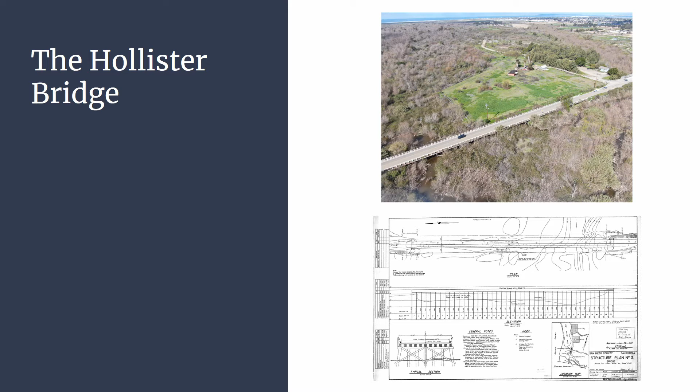The existing Hollister Street Bridge, shown here, is approximately 820 feet and made primarily of wood. The bridge has long outlived its purpose in serving the county of San Diego. We have answered the county's demands, and the new bridge will have an equestrian lane, wider shoulders, and a pedestrian sidewalk.

After further research and analyzing the needs from local law enforcement and first responders, we decided to demolish the bridge in 2 phases. The reason for this is because Hollister Street is the only efficient route to get to the community south of the Tijuana River, and closing that access can add up to 10 minutes of response time.

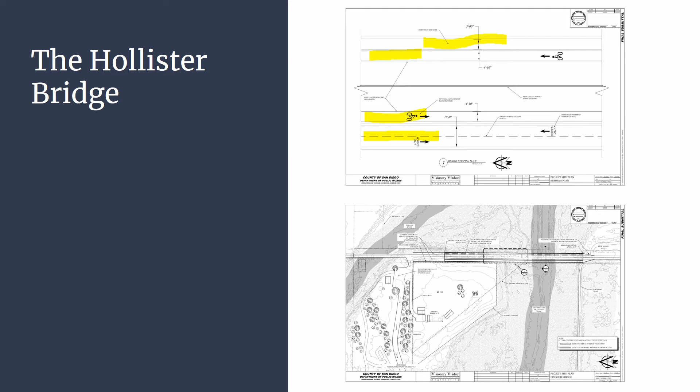It is estimated that approximately 35,000 cubic yards of unclassified fill material was placed on the Brown property by a previous owner and now needs to be removed. The removal of the illegal fill is important for the local area as its placement on the property is believed to have an adverse effect on flooding in the surrounding area. Studies on how this fill removal will affect the bridge design and the surrounding hydrology were conducted.

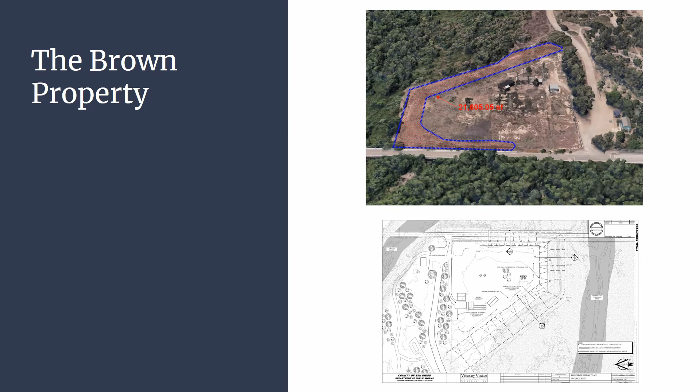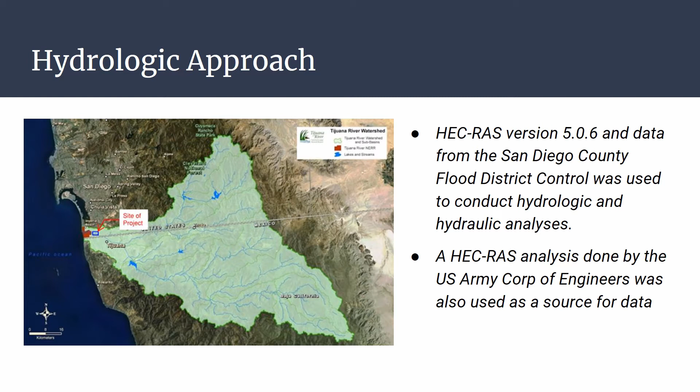Hello, my name is Daniel Olague, and I was in charge of the hydraulic analysis. For the hydraulic approach, HEC-RAS version 5.0.6 and data from the San Diego County Flood Control District was used along with a HEC-RAS analysis on the Tijuana River that was already conducted by the United States Army Corps of Engineers. From that report, a table was provided by the International Boundary and Water Commission giving the annual peak flows from 1962 to 2015.

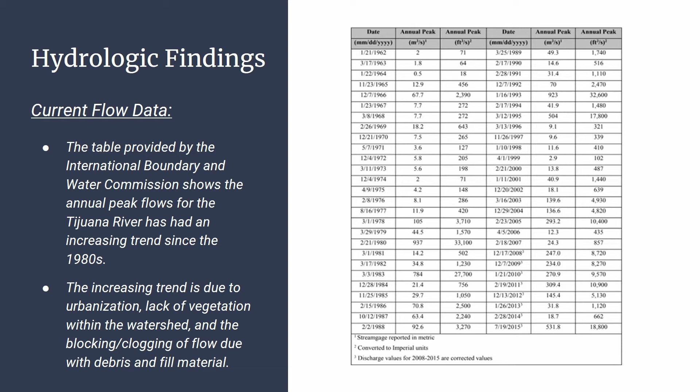As you can see, the trend after 1980 shows a gradual increase in peak flow. This trend is most likely due to urbanization, lack of vegetation, and clogging of flow due to debris and fill material within the Tijuana River watershed.

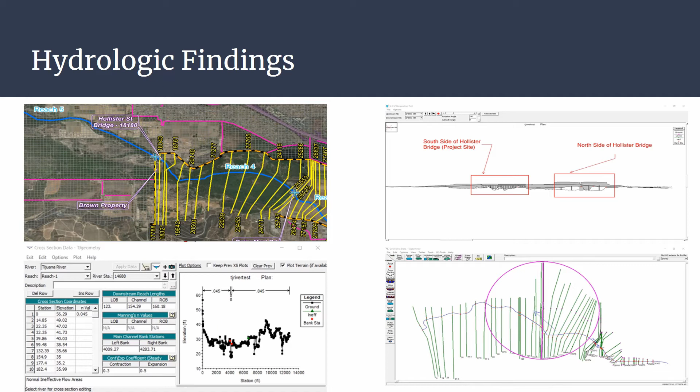Here on the top left is a picture also taken from the United States Army Corps of Engineers HEC-RAS analysis and how they created different reaches and stations for the Tijuana River. The other pictures are screen captures of geometric data of the river station containing the Hollister Bridge and Brown property area. This was found using data provided by the Flood Control District during the HEC-RAS analysis attempted.

Hi, I am Ricardo Ibarra, and I am the Environmental/Stormwater Engineer for Visionary Viaduct. I was in charge of the stormwater analysis for this project. The goal was to create a drainage system that will mitigate any adverse flooding effects from the newly built Hollister Bridge and on the removal of the fill of the Brown property. The goal is to generate no more runoff after development than before development.

San Diego County Hydrology Manual as well as SanGIS website was used to find the soil types in the site location as well as the rain intensity. The flow rate in the area was found using the rational method. After plugging in values into the equation, we found that the flow rate in the areas were 1.13 for the Brown property and 0.17 cubic feet per second in the Hollister Bridge area. Inlet areas of 0.13 feet squared and 0.75 feet squared on concrete sewer pipes of 5-inch diameter should be installed to minimize the rain runoff from the site location.

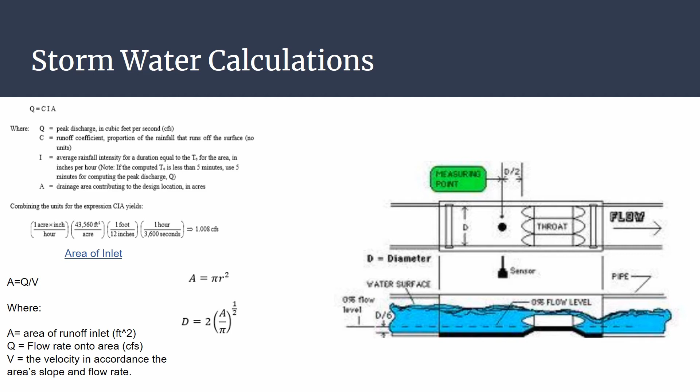The purpose of the SWPPP is to maintain water quality by keeping documentation and following BMPs for this project. Visionary Viaduct will oversee that everything in this SWPPP is accurate and complies with San Diego County regulations. The project is being performed with County of San Diego, California jurisdiction. The SWPPP has been prepared to comply with State Water Resources Control Board, National Pollutant Discharge Elimination System, waste discharge requirements, and together these measures will minimize stormwater runoff and keep the construction site from receiving costly penalties. Most important, the job will be completed with minimal environmental impact.

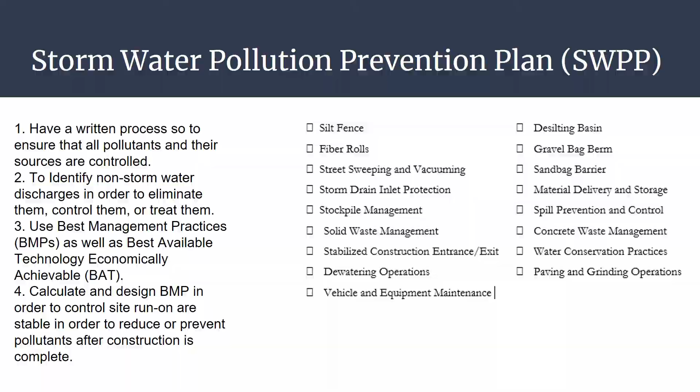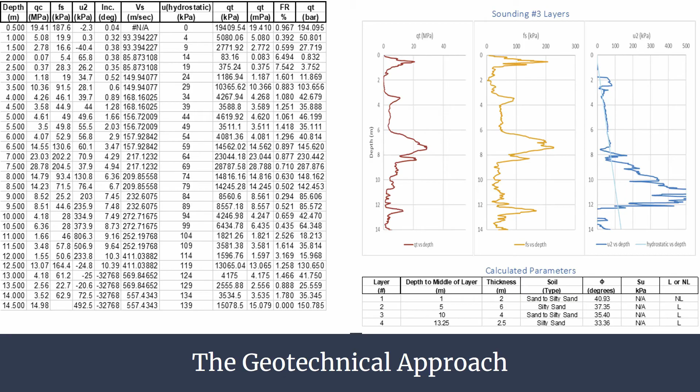So in summary, the geotechnical analysis showed that the subsurface layers were all susceptible to liquefaction and all sand layers. Soil is saturated with the water table being 2 feet below the surface. The illegal fill is approximately 7 to 10 feet in depth, and the illegal fill is mostly unusable according to local rangers.

So my recommendations, in accordance to my findings, were the substructure design should consider that all layers are liquefiable, possibly drilling the substructure all the way to bedrock and to account for that in their design. And for the grading of the Brown property, to not exceed an angle of 40 degrees in accordance to the friction angle of the soil.

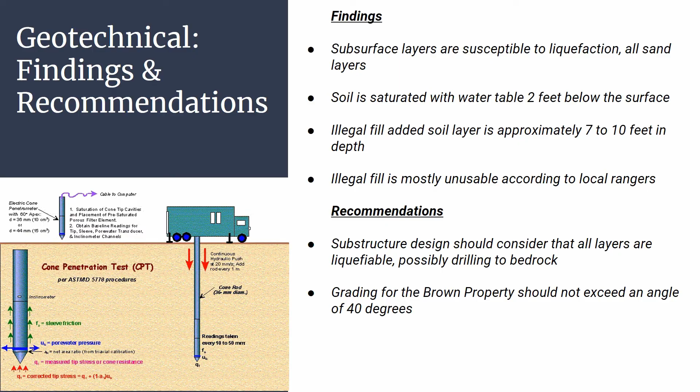Hello, this is Bryan, and now we'll be going over the substructural part of the structure report. First, we'll start off with the structural approach for the structural report. Chapter 13, Concrete Columns from Caltrans Bridge Design Practice, 4th edition, and ACI 318 were used as guidance for column design. And for pile design, Chapter 16, Deep Foundations, Dr. Valdez's CIV 465 reader and Edwards' analysis of the cone penetration test data were all taken into account.

Now we'll go over the structural findings for substructure. For column design, due to having a construction plan in which the bridge will be cut based on the center line striping rather than the center of the bridge, the columns needed to be designed to hold 60% of the total load. Due to this, the columns were designed to be 37 inches by 37 inches with a length of 20 feet. The column was then reinforced with 16 number 8 rebars and a number 4 tieback to prevent shear.

For pile designs, because of the amount of load imposed by the bridge, it was decided to design deep foundations. The piles will be square piles and made out of concrete with a side length of 1.6 feet and will be 14.5 feet in depth. A pile cap will be used to connect the columns to the pile. The square pile cap is to be made out of concrete, being 96.7 inches by 96.7 inches with a thickness of 32 inches.

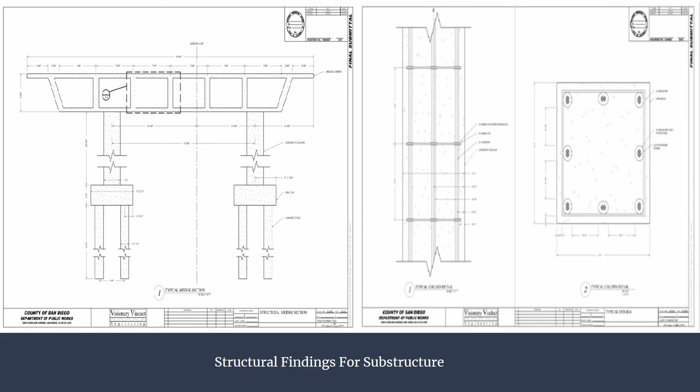My name is Argamaso, and I am the structural engineer responsible for the design of the superstructure of the new bridge. To design the bridge, we used the Bridge Design Practice posted in February 2015 by Caltrans, specifically citing Chapter 7, which talked about the post-tension concrete girders, and Chapter 10, which discussed the design for a concrete deck.

In order to come up with a preliminary design for the bridge, we needed 2 parameters which were discussed earlier. The first parameter was the width of the new bridge, which was to include a new equestrian path, a new sidewalk, as well as the extension of existing shoulders. This new width came out to 54 feet. The second parameter we needed was the longest span at any point along the bridge, which was discussed by our structural engineer responsible for the substructure. The longest span came out to 94 feet.

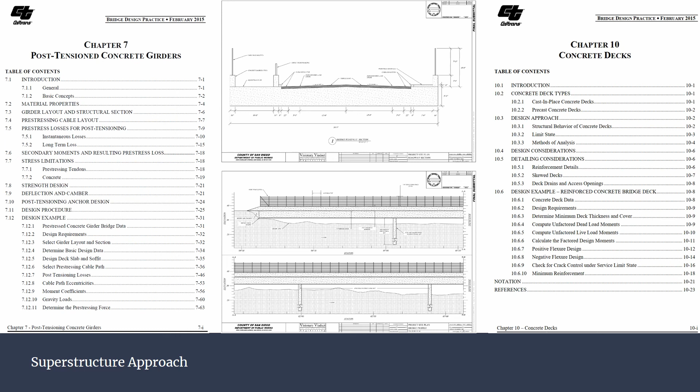Using these parameters, we were able to come up with a preliminary design for the bridge, and then after that, we are able to test the bridge to make sure that it would be able to withstand any moments and forces that it may experience throughout its 70-year expectancy. A preliminary design for the bridge is made based on the parameters just discussed, and we found that we can use 7 girders with an overall depth of 4.75 feet for the structure, and that we can use 7.5 inches for the deck thickness and 6 inches for the soffit thickness.

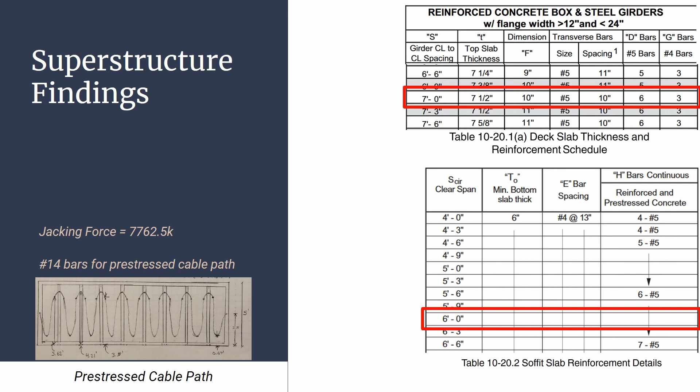Next, we estimate what the jacking force of the overall bridge is going to be so we can continue with our calculations. A prestressed cable path is determined based on this preliminary jacking force, and then calculations are done to confirm that the jacking force we estimated still holds true, which we found to be 7,762.5 kips. Finally, calculations are done to ensure that the bridge would be able to resist all moments and forces that it's going to experience in its lifetime.

Hello, my name is Kenneth Gervacio, and my task for this project was to estimate the overall cost of the bridge. As you can see, our total project cost comes in just above $11.5 million. Of that $11.5 million, the bulk of the cost came in the form of bridge construction, roughly $8.7 million. The second bulk came from labor estimate, which is roughly $1.6 million, and accounting for the fill was roughly $1 million.

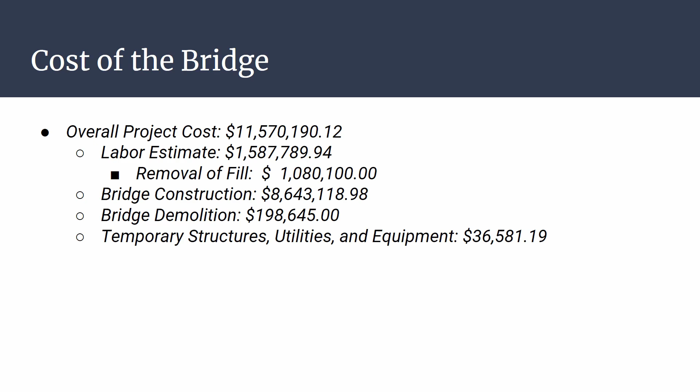In conclusion, we at Visionary Viaduct Engineering are confident in our design and reports and hope to work with you again.